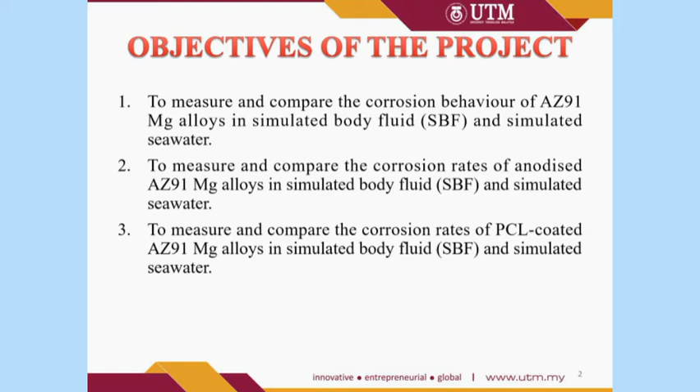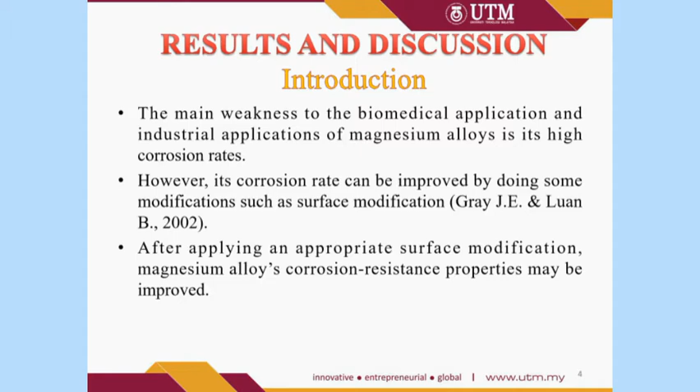In results and discussion, the main weakness of magnesium alloys is their high corrosion rate. It can be improved by surface modification. It is beneficial if the corrosion rate of different surface modifications of AZ91 magnesium alloys can be discussed, and then find out the most suitable surface modification for different applications.

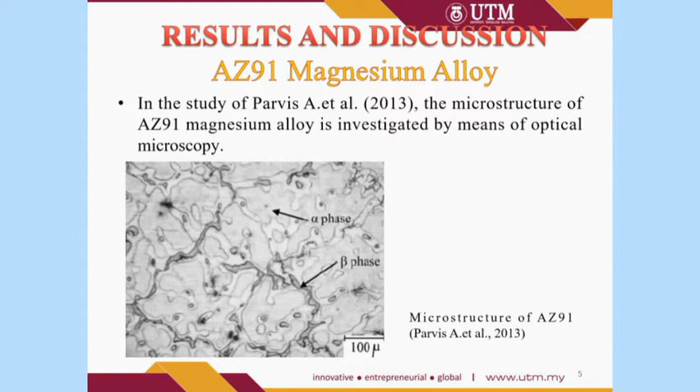It can be observed that the chemical composition of the AZ91 magnesium alloy is different in the beta and alpha phases. In the alpha phase, there are magnesium, oxygen and aluminum, while in the beta phase, there is an addition of zinc. In the beta phase, the chemical composition matches the composition of AZ91 magnesium alloy. The presence of beta phase in the microstructure results in higher tensile and ductile properties.

Therefore, the AZ91 magnesium alloy is a suitable magnesium alloy for industrial application, as it has excellent tensile properties after reviewing some journals. Therefore, it is able to fulfill the applications of the specimen in the project, which are biomedical and industrial applications.

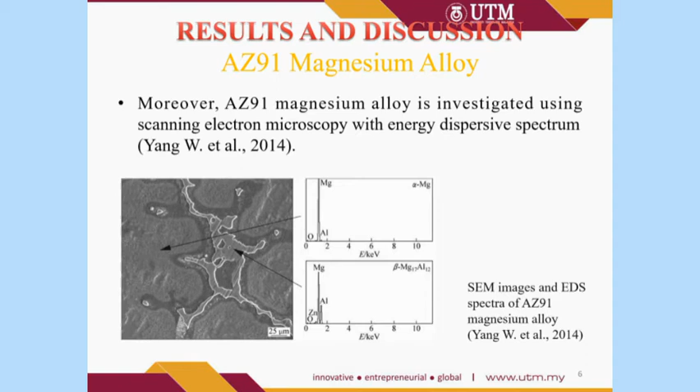The effect of PCL coating on slowing the degradation and improving corrosion resistance has been investigated. They found that the modified ceramic scaffold with PCL polymer could control degradation. Based on previous study, the application of PCL coating can be an effective method of controlling magnesium alloy degradation and bioactivity for tissue engineering applications. Therefore, PCL coating is selected in the project to increase the corrosion resistance of AZ91.

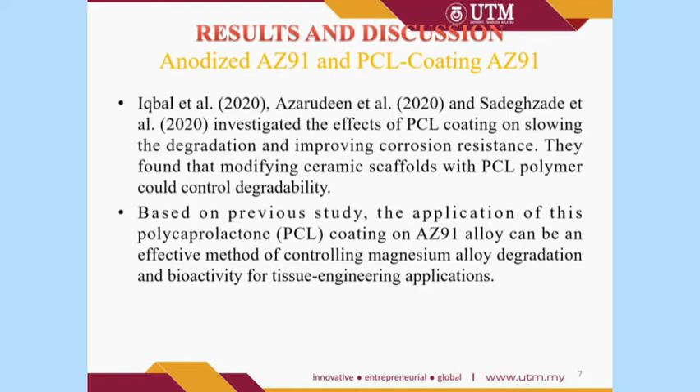When the surface is in contact with a corrosive environment, magnesium oxide will degrade first to protect and slow down the degradation of AZ91. The anodized layer makes AZ91 more corrosion resistant. Therefore, it is an effective method for protecting magnesium alloy from degradation due to the formation of the anodized layer, and it is suitable for industrial application.

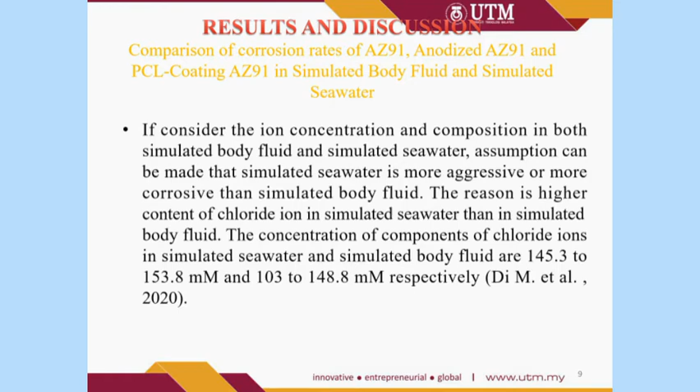In the comparison of corrosion rate in simulated body fluid and simulated seawater, it considers the ion concentration in both solutions. An assumption can be made that simulated seawater is more aggressive than simulated body fluid. This is because of the higher content of chloride ions in simulated seawater than in simulated body fluid. The concentration of chloride ions in simulated seawater is 145.3 to 153.8 mM, while for the simulated body fluid it is 103 to 148.8 respectively.

The higher charge transfer resistance indicates the specimen has good corrosion resistance. It can be supported by the Nyquist plot. In the Nyquist plot, the diameter is directly proportional to the charge transfer resistance. An increase in the diameter corresponds to an increase in corrosion resistance. Therefore, the corrosion resistance of the PCL coated sample is higher than the uncoated sample, as the diameter of the semicircle of the PCL coated specimen is bigger than the uncoated specimen. It may be due to a thin film or layer offering sufficient protection for the substrate against corrosion.

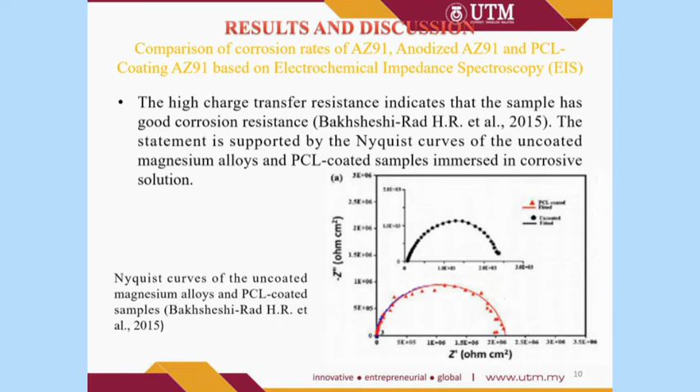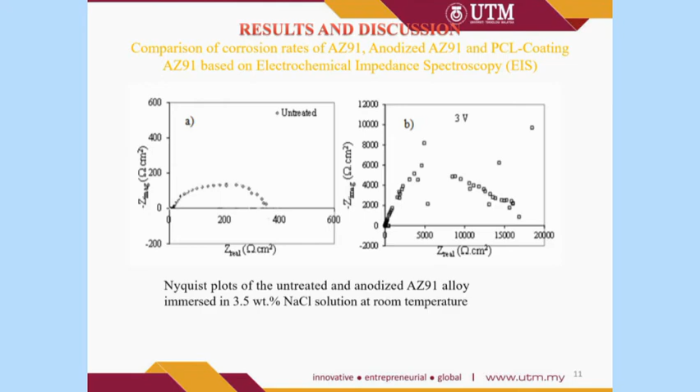In addition, there is no comparison of corrosion resistance between the anodized sample and the PCL coated sample in the project. This is because the applications for the anodized sample and PCL coated sample are different, which are industry application and biomedical application respectively. Their material properties are also different, therefore there is no comparability among them.

The corrosion potential and corrosion current density characterize magnesium alloys' resistance to corrosion. A high corrosion potential and a low corrosion current density are indicative of good corrosion resistance based on previous study.

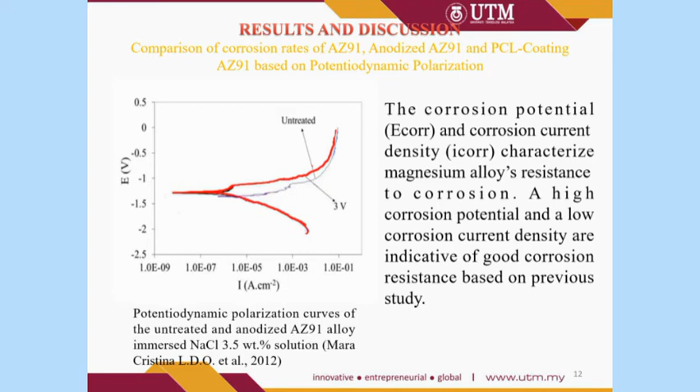Additionally, the PCL coated magnesium alloy is less susceptible to corrosion and has a lower corrosion rate than the uncoated one. It can be supported by the study of Bakhsheshi-Rad, presenting the more negative corrosion potential of uncoated compared to the coated one. PCL coating showed a lower corrosion rate than uncoated. This is because of the coating preventing interaction between the electrolyte solution and substrate during immersion.

There are similar statements that PCL coated AZ91 has better corrosion resistance than uncoated, and also anodized AZ91 has higher corrosion resistance than the untreated one based on EIS and potentiodynamic polarization.

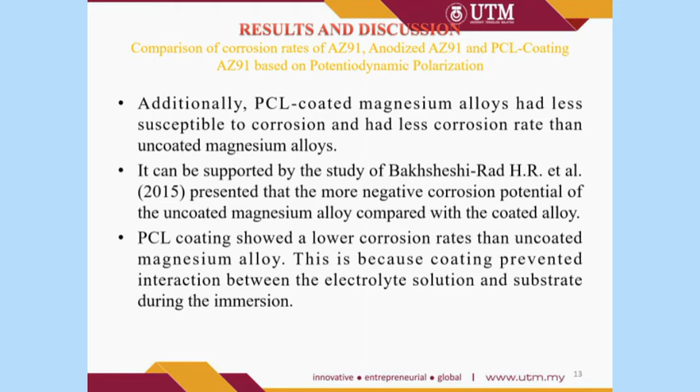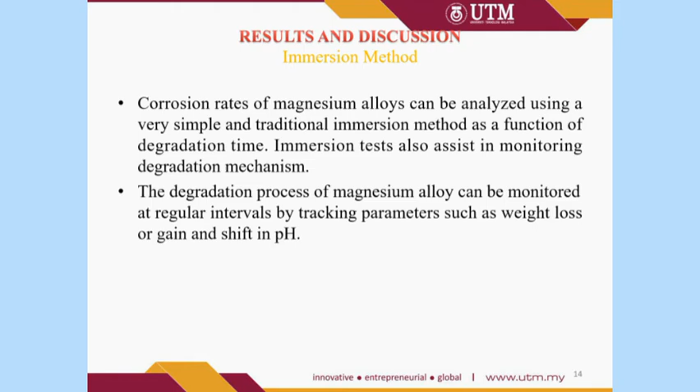Corrosion rate of magnesium alloy can be analyzed using very simple and traditional immersion methods as a function of degradation time. The degradation process of magnesium alloy can be monitored by tracking parameters such as weight loss or shift in pH. Weight loss of the anodized specimen and untreated specimen increases with immersion time, but the weight loss of the anodized specimen is less than the untreated specimen. This means that the corrosion rate of the anodized specimen is lower than the untreated specimen.

Another study also showed that the uncoated sample suffered corrosion attack compared to the PCL coated one. It is obvious that the anodized AZ91 and PCL coated are more protective against corrosion than untreated AZ91. This can be explained by the occurrence of corrosion attack in the uncoated sample being due to higher corrosion current density and lower electrochemical impedance of the uncoated sample.

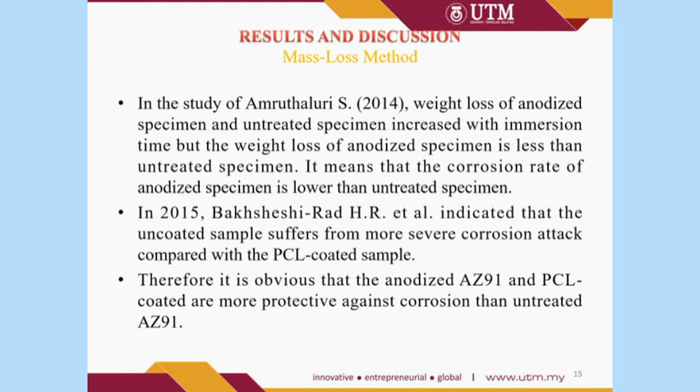The change in pH indicates the occurrence of corrosion of the specimen. As we know, magnesium degradation will make the surroundings more alkaline or increase the pH value. However, there is a decrease in pH value during immersion. This is due to the corrosion product formed on the surface, protecting the surface of the substrate, causing the pH to reduce. With the balance between the protective effect of corrosion product and corrosion effect of solution on magnesium alloys, the pH marginally increased and gradually leveled off.

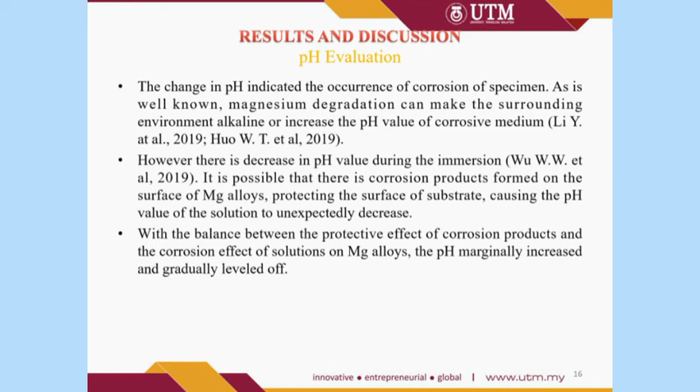Although there was a fluctuation in pH value of the corrosive medium, it is overall considered that the pH value of the corrosive medium increased, indicating corrosion occurs.

In conclusion, PCL coated and anodized film on magnesium alloy was studied. The electrochemical tests showed that the corrosion resistance of anodized magnesium alloys is better than the untreated one, and the corrosion resistance of PCL coated magnesium alloy is better than the uncoated one. Immersion tests also indicated that PCL coating and anodized film can effectively protect magnesium alloy against corrosion.

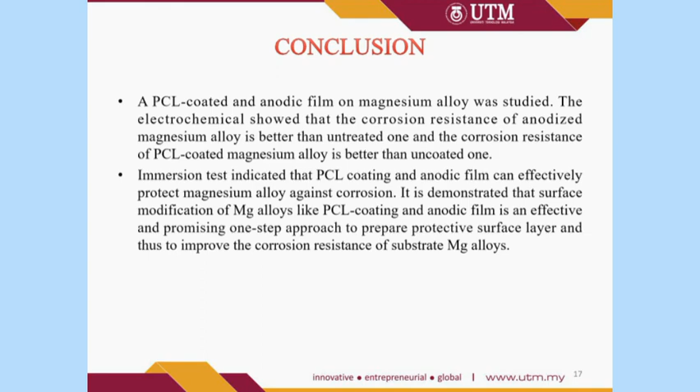It is demonstrated that surface modification of magnesium alloy like PCL coating and anodized film is an effective one-step approach to prepare a protective surface layer and to improve the corrosion resistance of the substrate magnesium alloy.

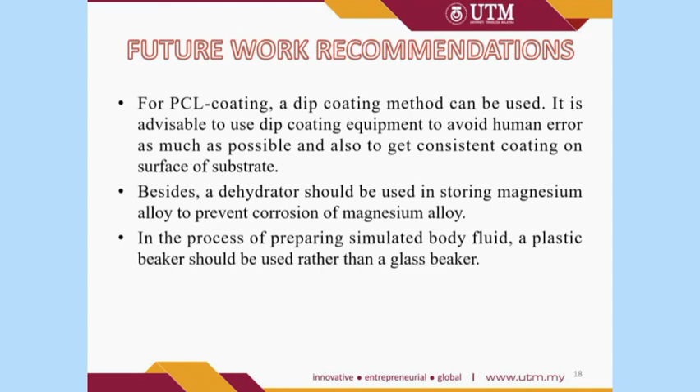There are a few future work recommendations, such as for PCL coating, a dip coating method can be used. It is advisable to use dip coating equipment to avoid human error as much as possible and also to get a consistent coating on the surface. Besides, a desiccator should be used in storing magnesium alloy. In the process of preparing SBF, a plastic beaker should be used rather than a glass beaker.